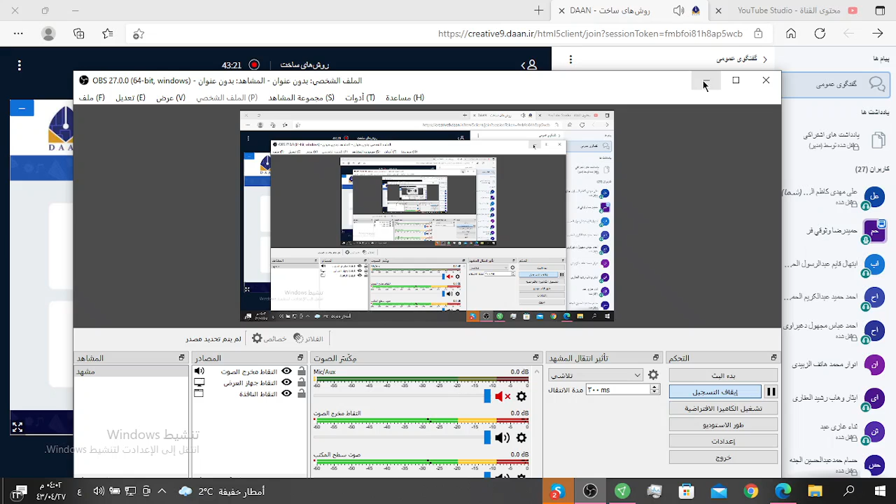Safer voice, Doctor Hamid. There's a mistake on my family name. My last name is Vosoughifar. We like void. Vosoughifar, no problem, go on please.

Content. Explain about content. Ahmed, please explain about your content. What, doctor? Can you see this slide? Please explain about that. Yeah, another slide. I said another slide.

What's the lightweight concrete? Can you see what's the lightweight concrete? Explain about that. Don't worry about that.

Please go on and continue your presentation. I'll share my screen done, and you can explain about it. You don't have any picture in Skype? Yes, doctor. Could you please check down?

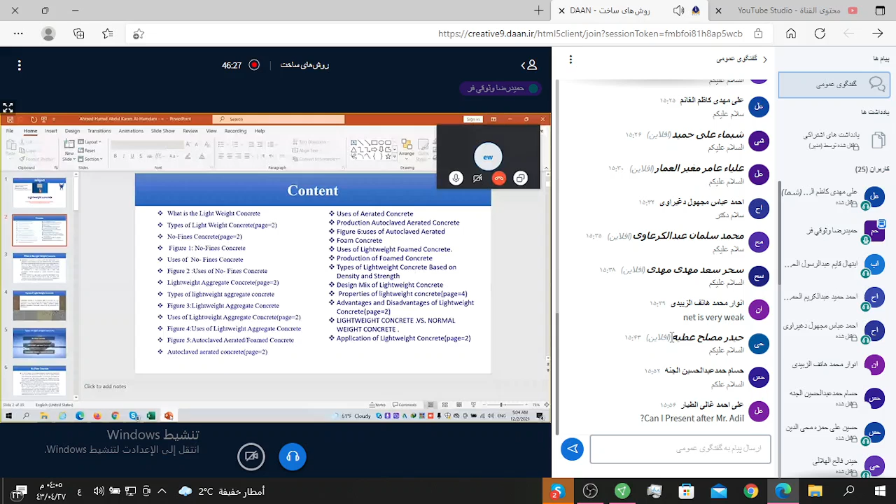Come on, please. Can you see the next slide? My friend, can you see? No. Okay, the title is What's the Lightweight Concrete?

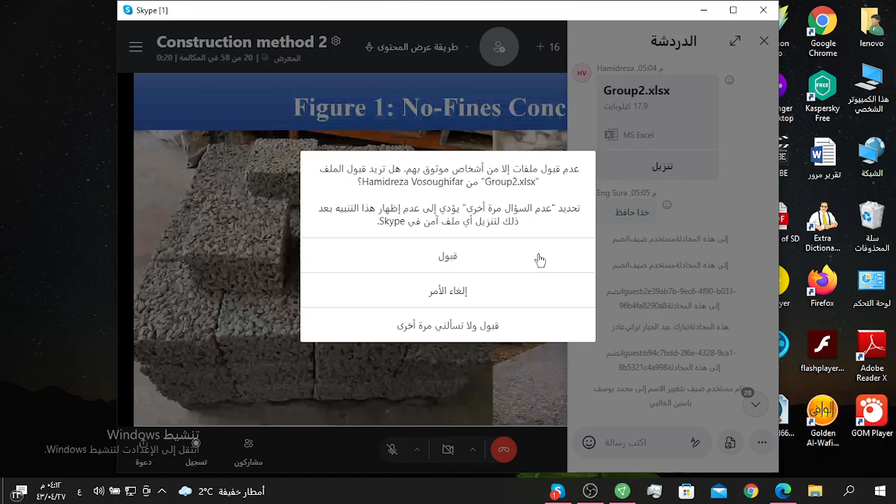Please, another doctor. Yeah, figure 1, no-fines concrete. I said it, you can see the figure, Figure 1, the no-fines concrete.

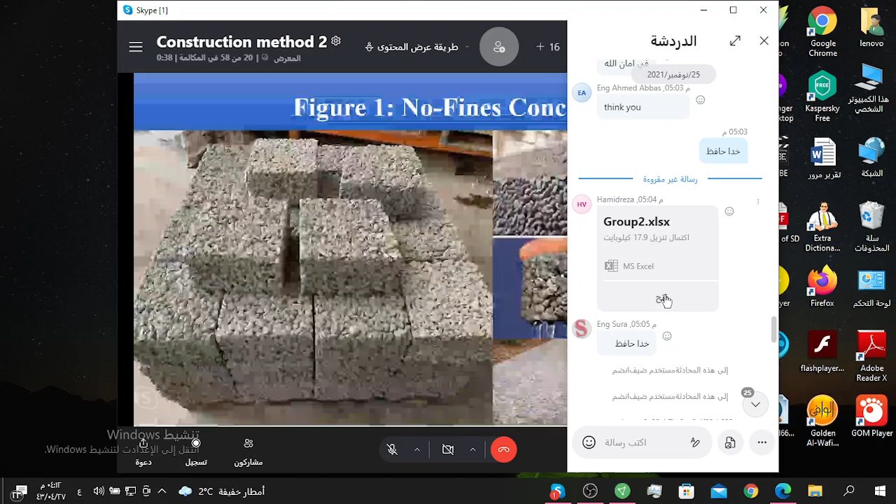Another page, doctor, so please. Picture. You want to explain about the picture? Picture, uses of no fine concrete. No fine concrete normally is not used in reinforcement concrete.

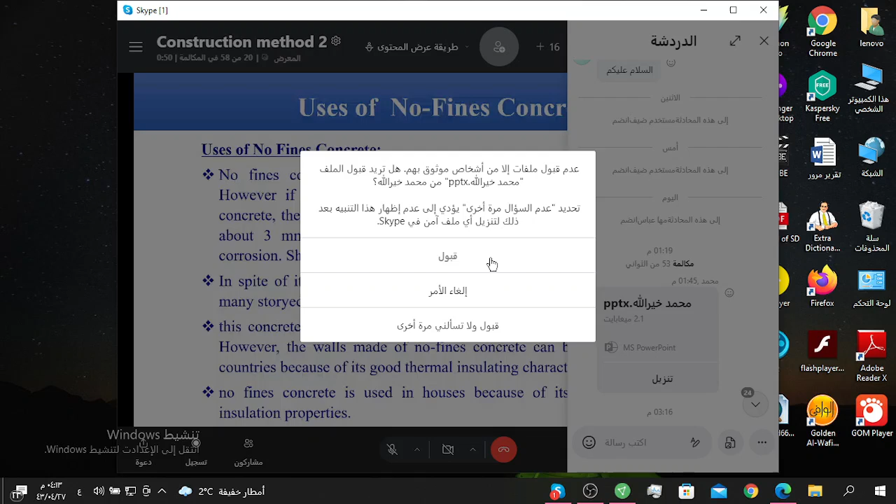However, if it is essential to use no fine concrete in reinforcement concrete, then the reinforcement has to be coated with a thin layer of about 3mm of cement paste to improve its bond and prevent corrosion. Short gritting may be applied for coating the reinforcement. In spite of its lower weight and strength, it can be used for even many storied buildings.

This concrete is not suitable for use in reinforced concrete structure. However, the walls made of no fine concrete can be used in cold countries because of its good thermal insulating characteristics. No fine concrete is used in houses because of its good thermal insulation properties.

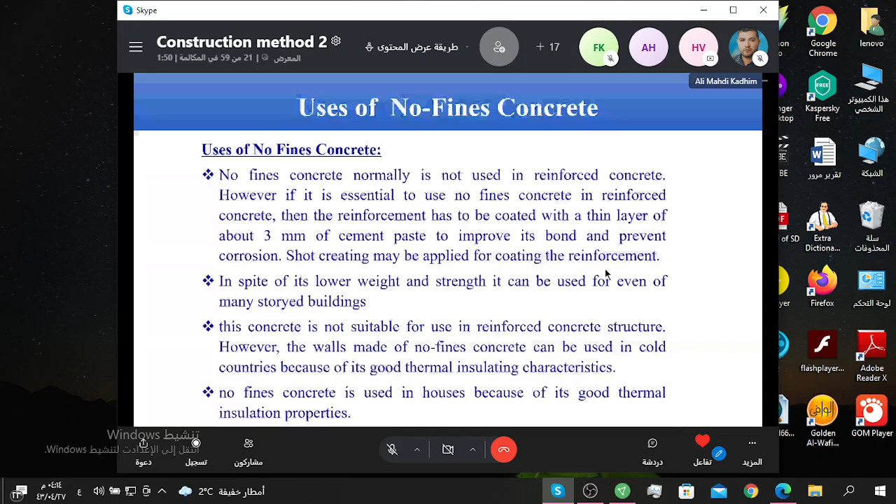Lightweight aggregate concrete. Another page. The lightweight aggregate is a kind of coarse aggregate which is used in the production of lightweight concrete produced like concrete blocks, structure concrete, and pavement. The shape of the lightweight aggregate used in concrete can be cubical, rounded, angular, or of any other shape. The shape and texture can directly affect its workability.

The compressive strength level, which is required by the construction industry to design strength of cast in place, precast, or pre-stressed concrete is known to be 3,000 to 5,000 PSI. It is something that can be easily achieved with the use of lightweight aggregate concrete.

The density of that lightweight concrete depends on mixture proportion, air content, water demand, density, and moisture content of the lightweight aggregate. The structure concrete density can be easily achieved with the use of lightweight aggregate concrete.

Another page, please, doctor. Yeah, I pressed the arrow key to show you the another slide. The lightweight aggregate concrete can be divided in two types according to the application. One is partially compacted lightweight aggregate concrete and the other is the structure lightweight aggregate concrete.

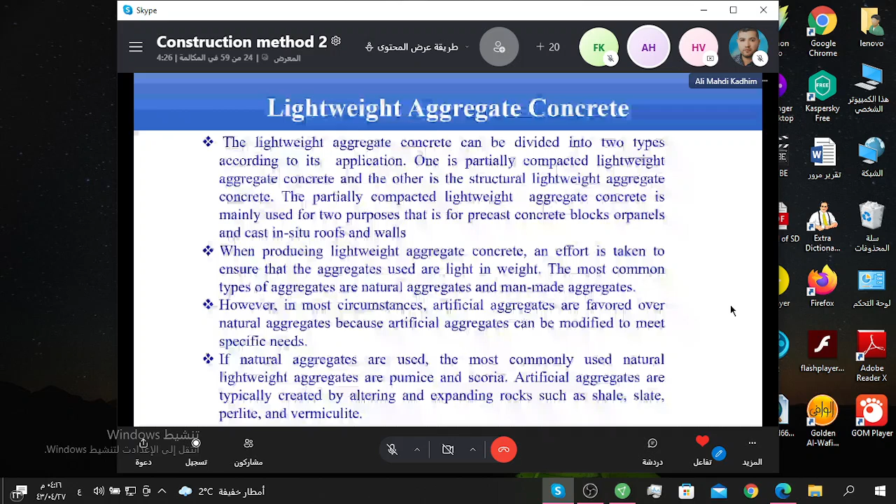The most common types of aggregate are natural aggregate and man-made aggregates. However, in most circumstances, artificial aggregate are favored over natural aggregate because artificial aggregate can be modified to meet specific needs. If natural aggregate are used, the most commonly used natural lightweight aggregates are pumice and scoria.

Artificial aggregate are typically created by altering and expanding rocks such as perlite and vermiculite. Another page, doctor, please.

Yeah, I said it, type of lightweight aggregate concrete. Lightweight aggregate are divided in two categories: lightweight natural aggregate and lightweight artificial aggregate.

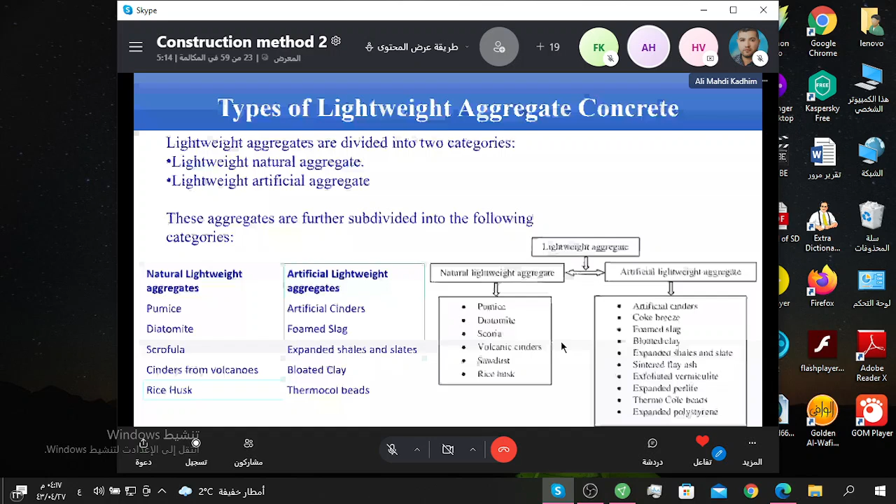No problem. These aggregates are further subdivided into the following categories: natural lightweight aggregates or artificial lightweight aggregate. Another page, doctor, please.

The figure of the lightweight aggregate concrete.

Figure 3, lightweight aggregate concrete.

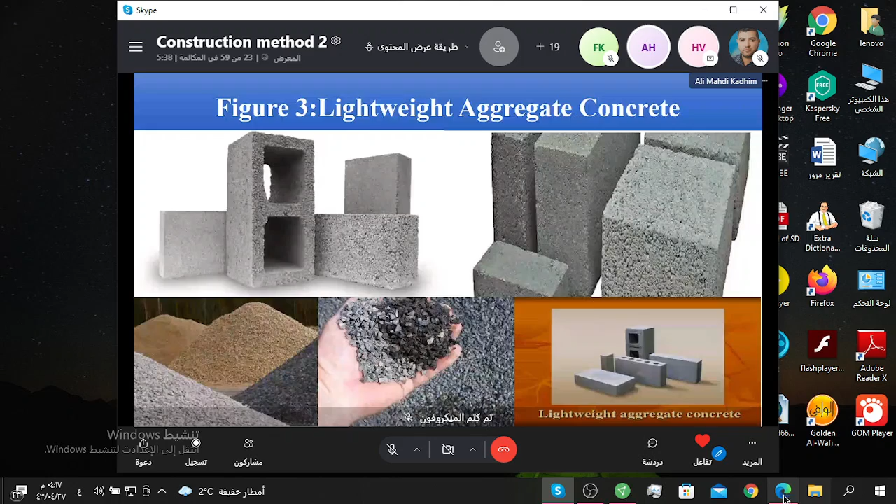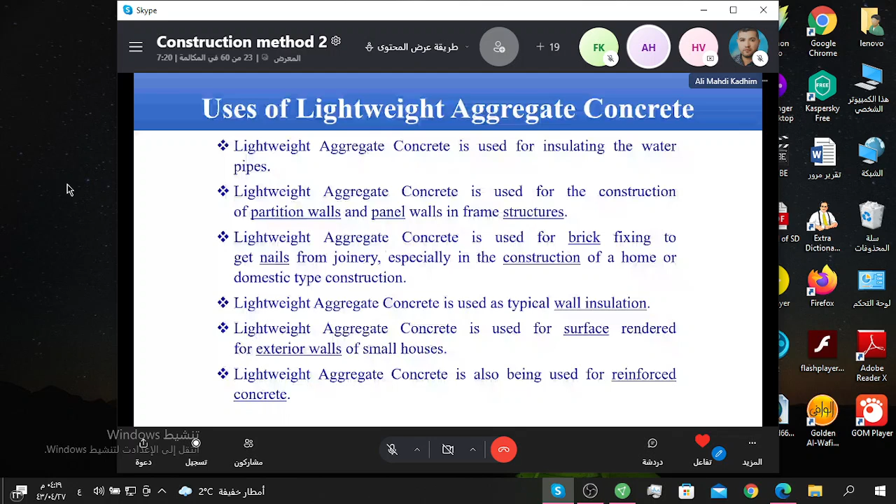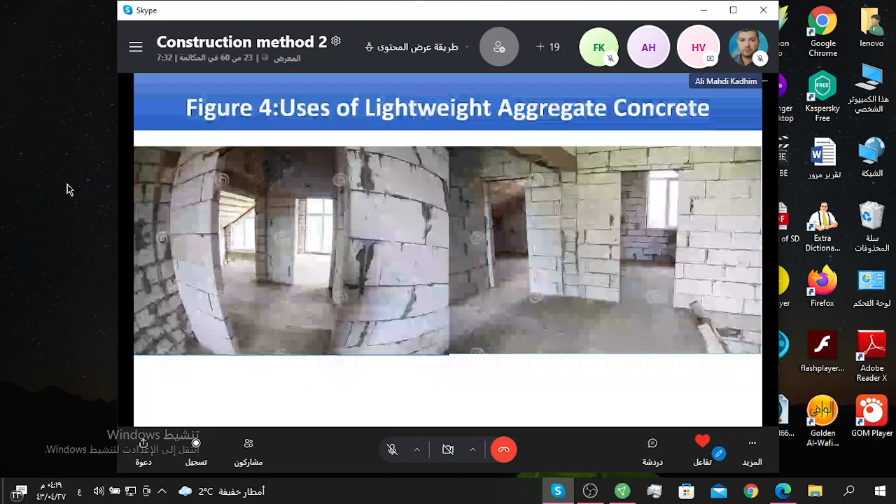AAC elements are strong and fire resistant. To gain durability, AAC must be coated with a finish, such as polymer modified stone or siding. AAC also offers sound and thermal insulation.

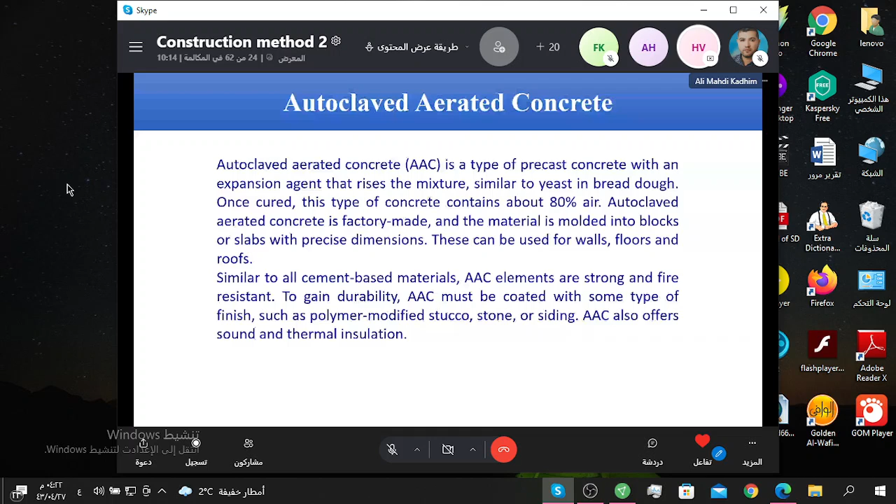Autoclaved aerated concrete does not contain coarse aggregate. It is made from a mixture of cement, lime, water, fine aggregate, and most of the times fly ash. An expansion agent such as aluminum powder is added to cause a chemical reaction creating bubbles that expand the mixture. Elements are cut into blocks or panels, reinforced, and then baked for fast curing.

The physical properties of AAC are listed below: density 20 to 50 PCF, compressive strength 300 to 900, thermal resistance 0.8 to 1.25, allowable shear stress 8 to 22, sound transmission class 40 for 4-inch thickness and 45 for 8-inch thickness.

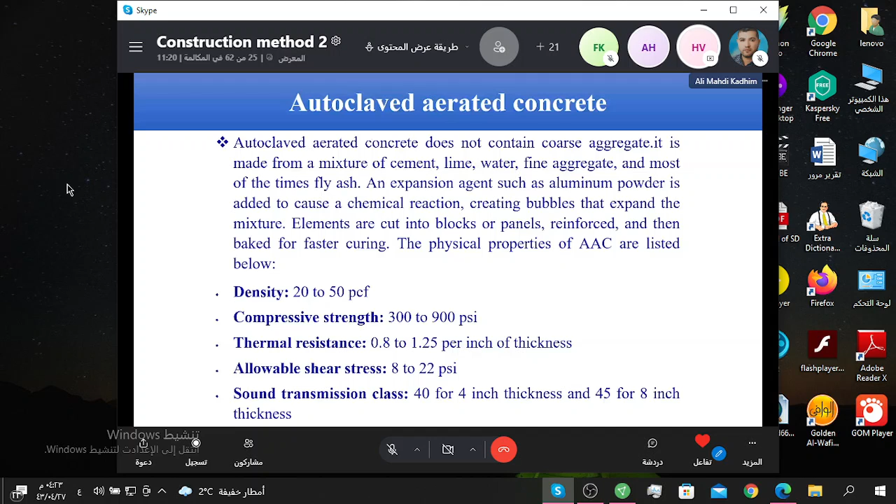Uses of aerated concrete: it is usually used for the following purposes. Due to its low thermal conductivity and light weight, it is mostly used for heat insulation. As it offers better fire resistance than ordinary concrete, it is used for fireproofing. Structural aerated concrete is used mostly in the form of precast members or autoclaved blocks. It can also be used for floor construction in place of hollow tile floors. Recently, it has been used for light insulation.

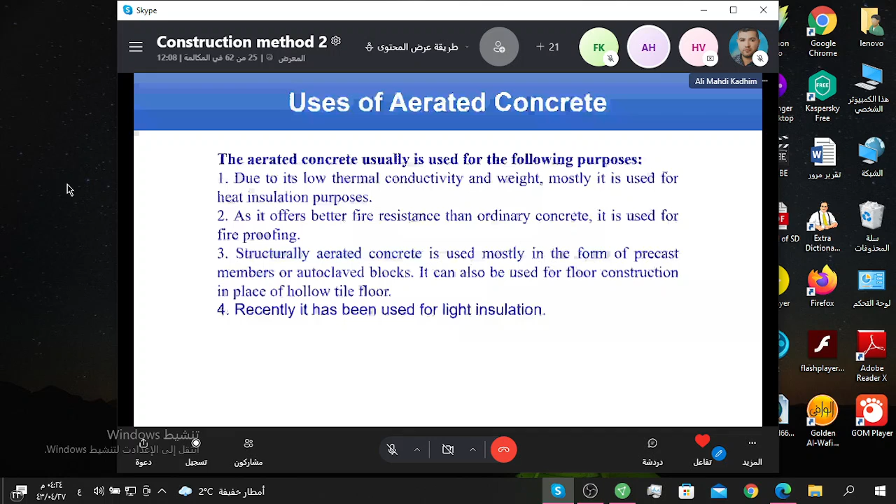Production of autoclaved aerated concrete: it is obtained by a chemical reaction generating gas in the fresh mortar. When this mortar sets, it contains a large number of gas bubbles. The consistency of the mortar should be such that the gas produced may expand it, but gas should not escape from it. The speed of gas evolution, consistency of the mortar, and its setting time should match with each other.

For generating gas, finely divided aluminum powder is most commonly used, in proportion of about 0.2% of the mass of the cement. The reaction between this active powder and calcium hydroxide or alkali liberates hydrogen bubbles. Powdered zinc or aluminum alloy can also be used. Sometimes hydrogen peroxide is used to produce oxygen bubbles.

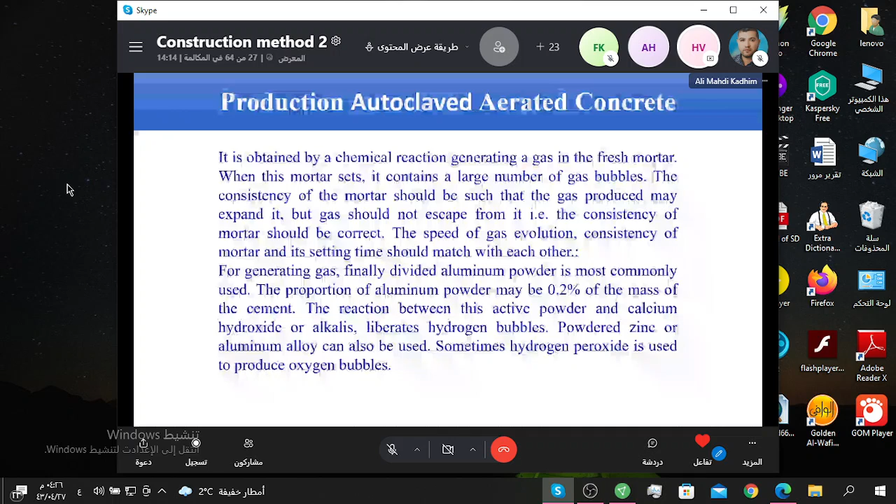Figure 6, uses of autoclaved aerated concrete.

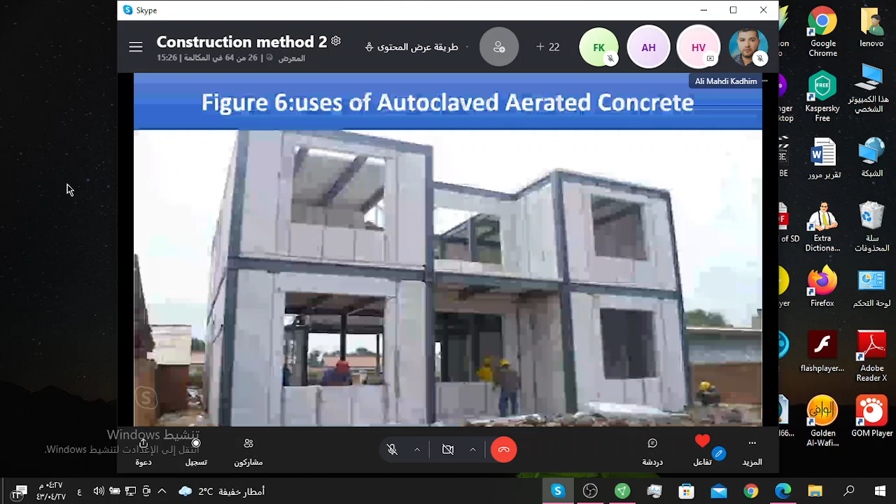Foam concrete is a type of lightweight concrete manufactured from cement, sand or fly ash, water, and foam. Foam concrete is in the form of foamed grout or foamed mortar. It can be defined as a cementitious material that consists of a minimum of 20% foam mechanically entrained into the plastic mortar.

The dry density of foamed concrete may vary from 300 to 1,600 kilogram per meter cube. The compressive strength of foam concrete, determined at 28 days, ranges from 0.2 to 10 Newton per millimeter square, or can go higher.

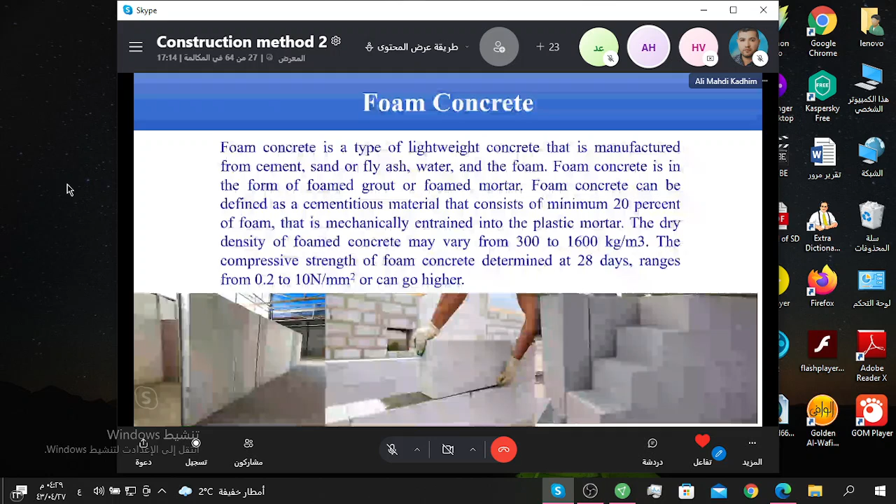Uses of lightweight foamed concrete: foamed concrete for void filling, foamed concrete roofing insulation, lightweight foamed concrete bridge abutment, foamed concrete for trench reinstatement, road sub base, bridges, bridge abutments, bridge strengthening, wall construction, tunneling, floor construction, lightweight precast blocks, groundworks and stabilization.

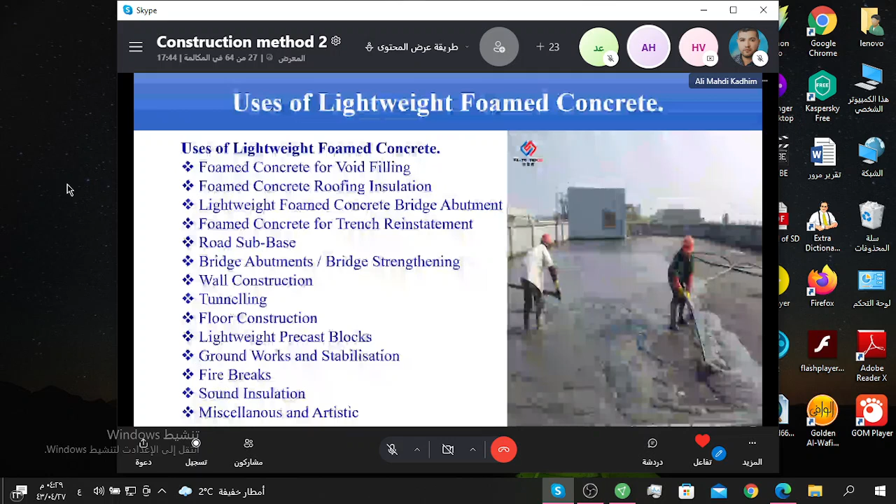Fire breaks, sound insulation, miscellaneous and artistic.

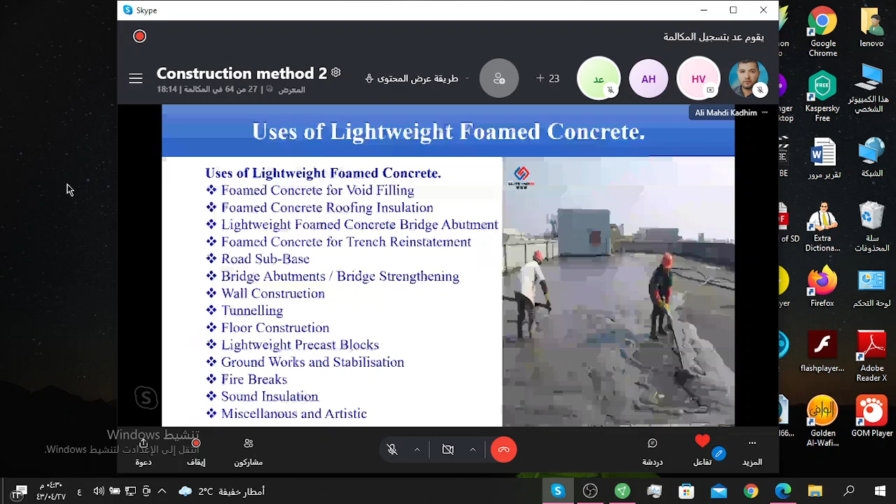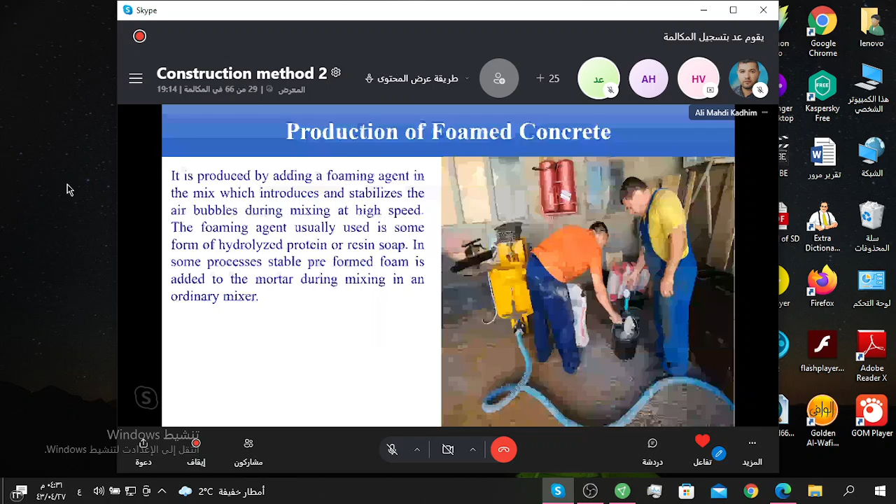Lightweight concrete can be classed according to its unit weight or density, which normally ranges up to 1,920 kilogram per cubic meter. According to the ACI committee, it's better to say kilogram per cubic meter.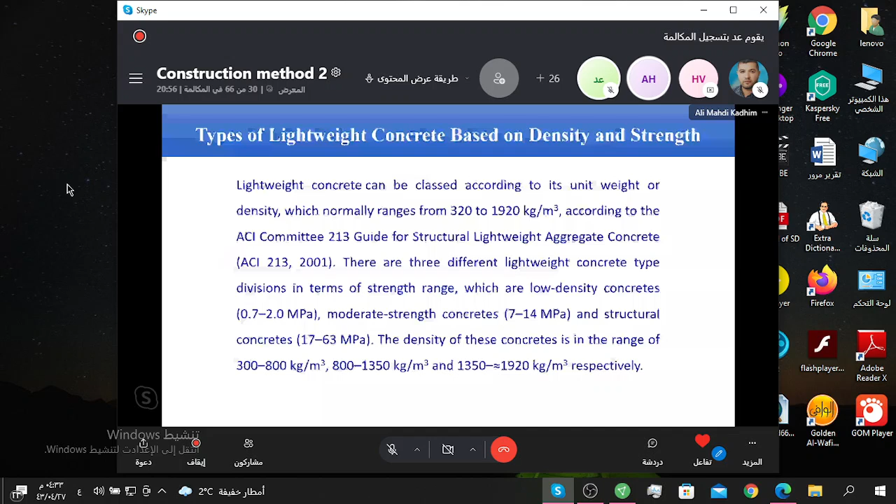ACI Committee 213, 2001, there are three different lightweight concrete types divided in terms of strength range: low density concrete 0.7 to 2 megapascal, moderate strength concrete 7 to 14 megapascal, and structural concrete 17 to 63 megapascal. The density of this concrete is in the range of 300 to 800 kilogram per cube meter.

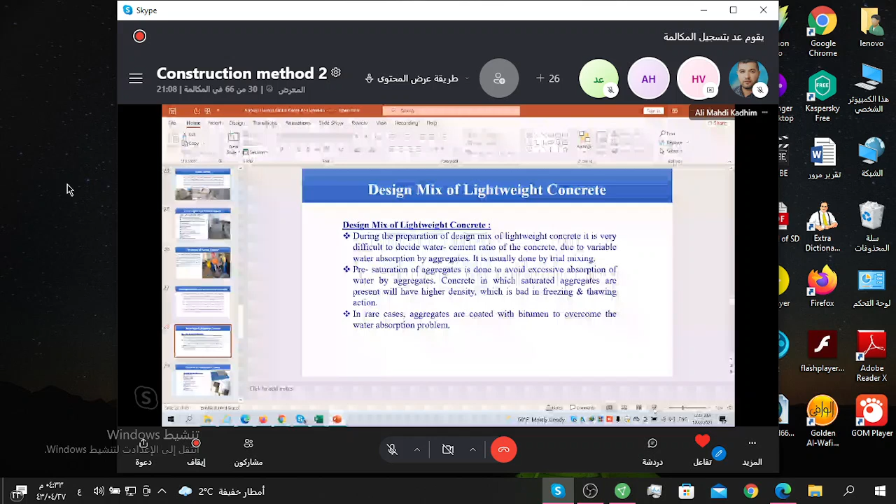During the preparation of the design mix of lightweight concrete, it is very difficult to decide the water cement ratio of the concrete due to the variable water absorption by aggregate. It is usually done by trial mixing.

Pre-saturation of aggregate is done to avoid excessive absorption of water by the aggregate. Concrete in which saturated aggregate are present will have higher density, which is bad in freezing-thawing action. In rare cases, aggregate are coated with bitumen to overcome the water absorption problem.

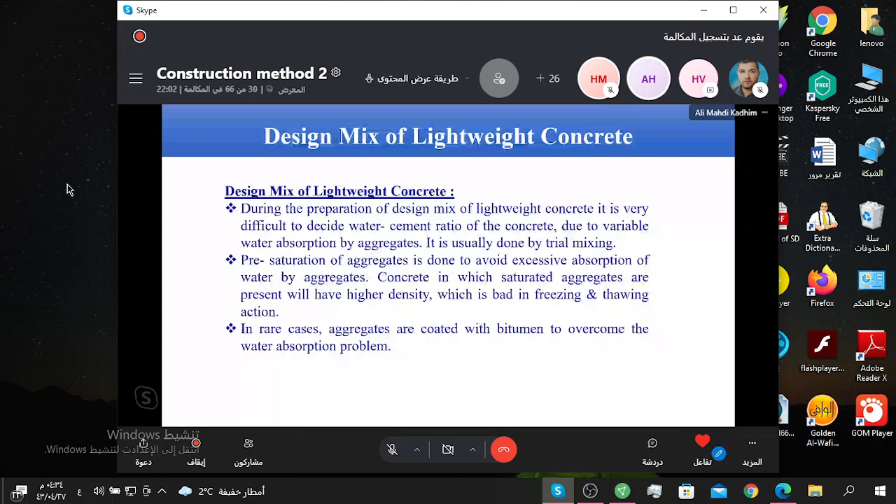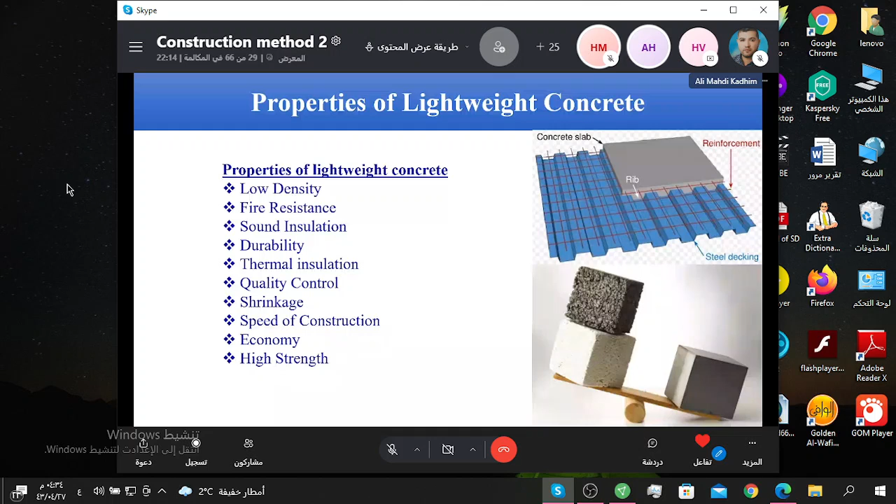High strength. Low density: the density of concrete varies from 300 to 1,200 kilogram per cube meter.

The lightest grade suits insulation purposes, while the heavier grades with adequate strength suit structural applications. The low density of cellular concrete makes it suitable for precast floor and roofing units, which are easy to handle and transport from the factory to the site.

Fire resistant: lightweight concrete has excellent fire resisting properties. Its low thermal conductivity makes it suitable for protecting other structures from the effects of fire.

Sound insulation: sound insulation in cellular concrete is normally not as good as in dense concrete.

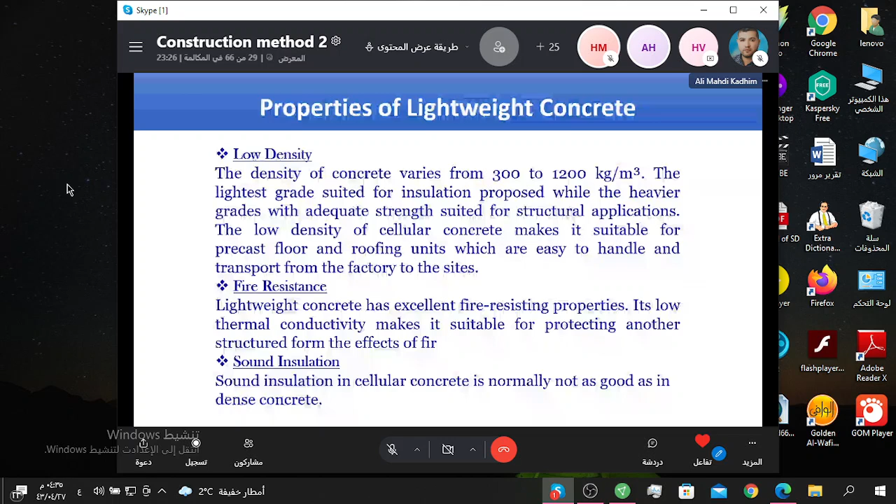Durability: aerated concrete is only slightly alkaline due to the porosity and low alkalinity. It does not give rust protection to steel, which is provided by dense compacted concrete.

Thermal insulation: the insulation value of lightweight concrete is about 3 to 6 times that of bricks, and about 10 times that of concrete. A 200 mm thick wall of aerated concrete of density 800 kilogram per cube meter has the same degree of insulation as a 400 mm thick wall of density 1,600 kilogram per cube meter.

Quality control: better quality control is achieved in the construction of a structure with lightweight concrete products, owing to the use of factory-made units.

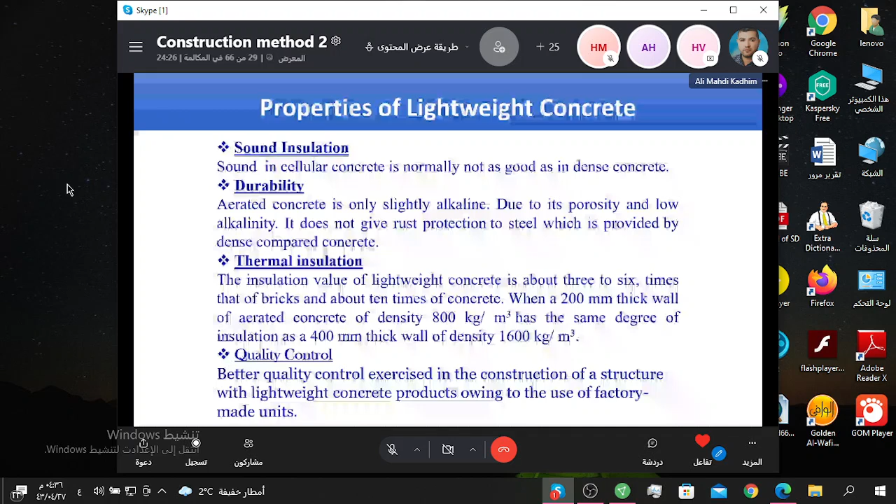Shrinkage: lightweight concrete shrinks very little.

Speed of construction: by utilizing unit prefabrication, the structure can be designed on the modular coordination principle, resulting in a faster pace of construction. Because of the excellent strength to weight ratio and lightweight of concrete products, their utilization results in less steel consumption.

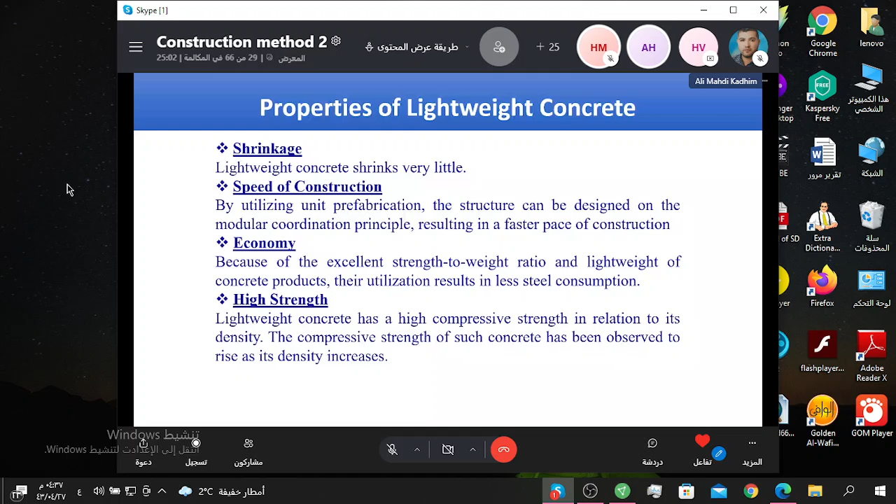High strength: lightweight concrete has high compressive strength in relation to its density. Lightweight concrete products are simple to cut, drill, nail, and saw. This property facilitates construction, and structural repair can be delayed as needed.

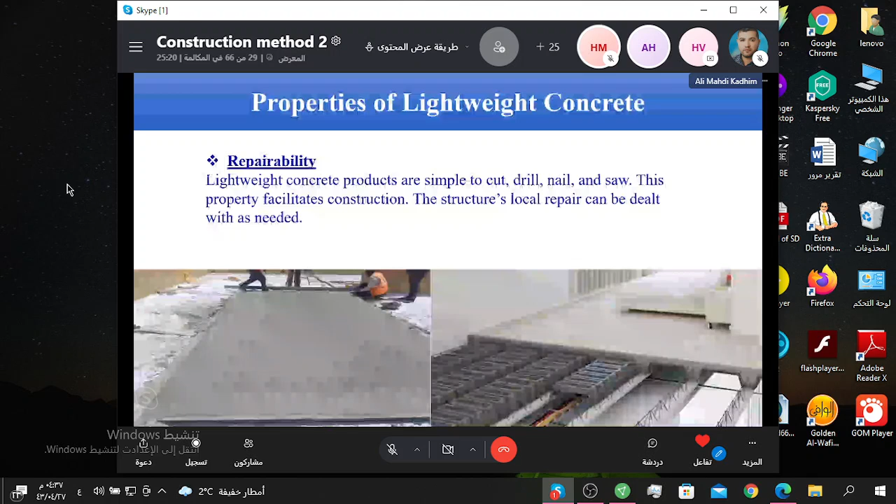Advantage: rapid and relatively simple construction, the faster construction method. Economical in terms of transportation as well as reduction in manpower.

Significant reduction of overall weight results in savings on structural frames, footing, or piles. Most lightweight concrete has better nailing and sawing properties than heavier and stronger conventional concrete.

Disadvantage: very sensitive to water content in the mixture, difficult to place and finish because of the porosity and angularity of the aggregate. In some mixes, the cement mortar may separate the aggregate and float towards the surface. Mixing time is longer than conventional concrete to assure proper mixing.

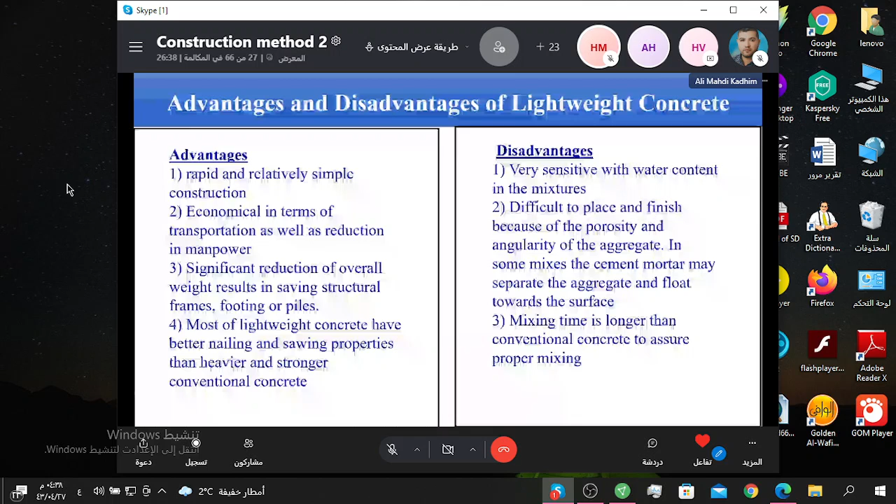It minimizes the dead load of the building. This is very important. As you know, the earthquake load depends on the dead load, live load, and the weight of the structure. When you reduce the weight of the structure, the earthquake load will be decreased.

Number 6. Enhanced workability.

Thermal conductivity is decreased with lightweight concrete. The use of lightweight concrete in rooms where air conditioning is to be installed would result in good thermal comfort and decreased power usage. It is stronger and more durable in comparison, and compared to regular concrete, has high resilience to freezing and thawing.

Because of the porosity and angularity of the aggregate, placement and finishing is difficult, necessitating the use of experienced labor. To ensure correct mixing, the mixing period is longer than that of standard concrete. Lightweight concrete is porous and has low resistance.

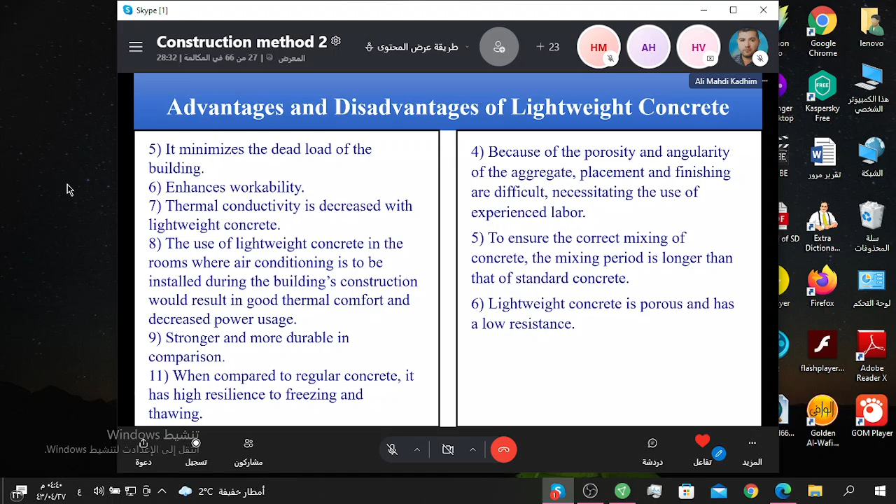Normal weight concrete is about 140 to 150 pounds per cubic foot, while lightweight concrete is about 90 to 115 pounds per cubic foot.

Normal concrete has lower water content, while lightweight concrete has higher water content. A project made with normal weight concrete requires additional materials for framing, cladding, and steel reinforcement, ultimately increasing overall costs. Lightweight concrete remains a cost-effective building material, especially for large projects.

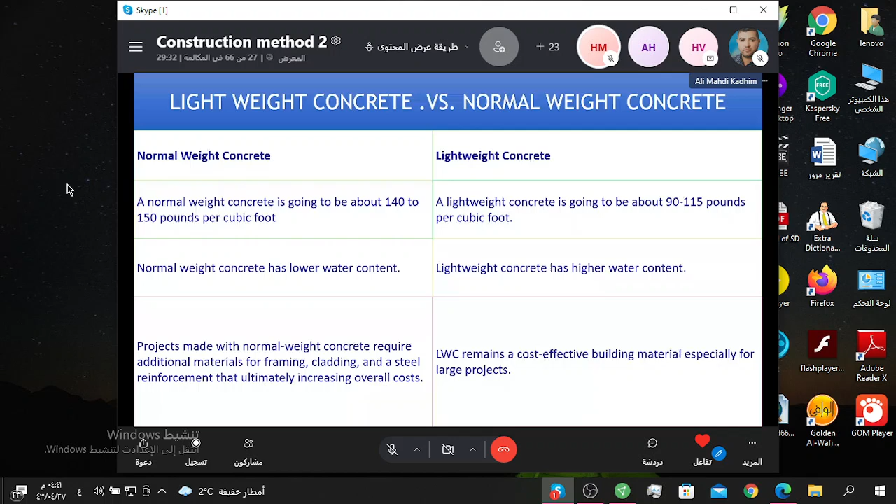Application of lightweight concrete: general lightweight concrete uses. Structural lightweight concrete can be used for the construction of residential and non-residential buildings in seismic areas.

It can also be used for the construction of underground bunkers. Structural lightweight concrete can be used in piers and beams, slabs and wall elements in steel and concrete frame buildings, parking structures, tilt-up walls, topping slabs, and composite slabs on top of metal decks.

Lightweight concrete can be used for making structures such as precast wall blocks and panels, homes on weak foundations, roof and building aprons, partitions, posts, shipbuilding, lightweight structure doors, bridge decks, and girders.

It's used for casing structural steel to protect it against fire and corrosion, or as a covering for architectural purposes.

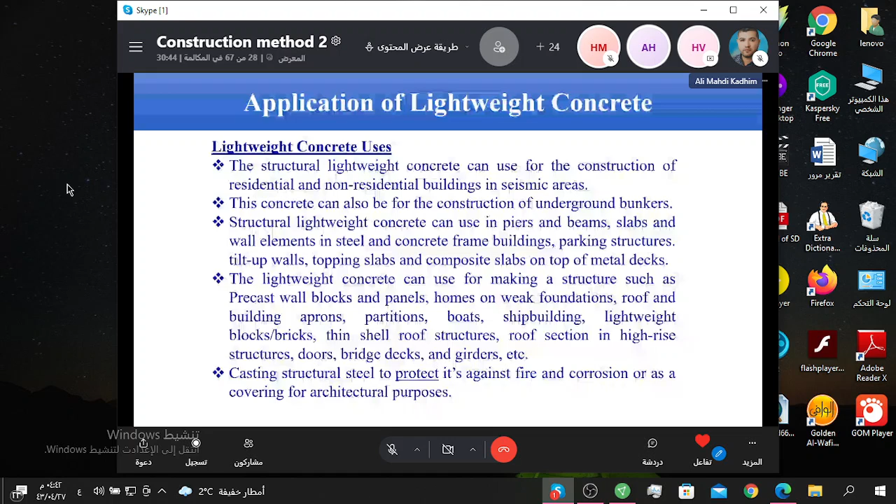Application of lightweight concrete: heat insulation on roofs, insulating water pipes, construction of partition walls and panel walls in frame structures, fixing bricks to receive nails for joinery, principally in domestic type construction, general insulation of walls, surface rendered for external walls of small houses.

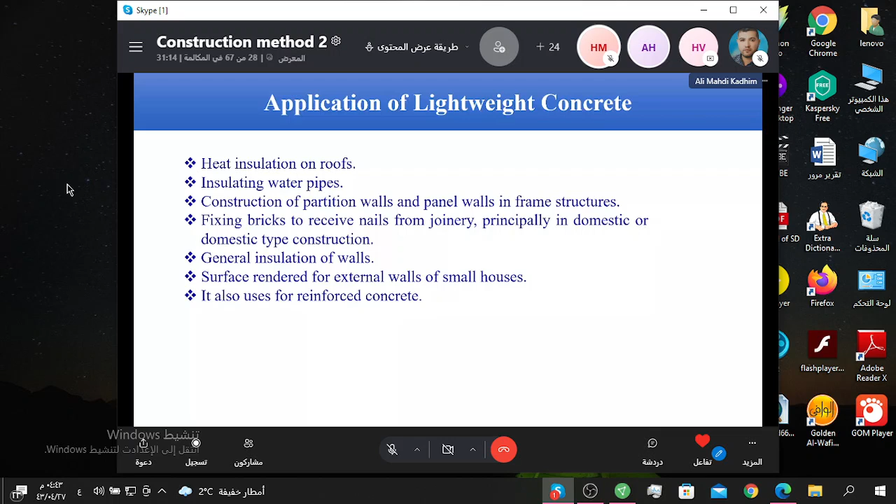It is also used for reinforced concrete.